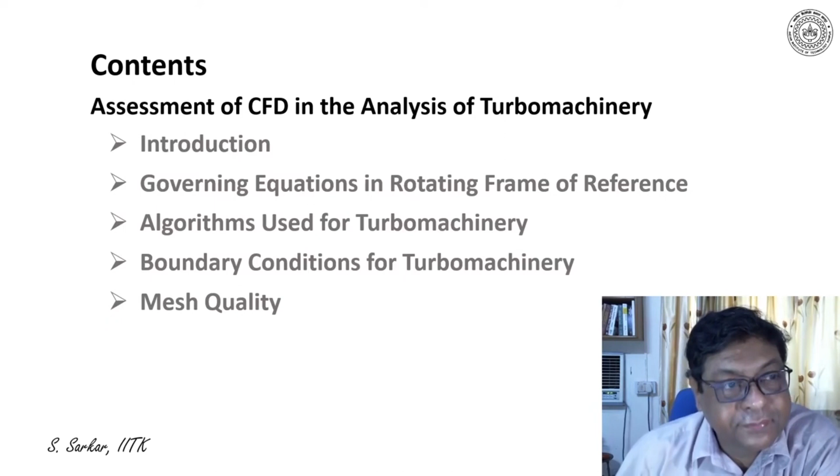In the previous lecture, I introduced computational fluid dynamics in brief. After this, the natural questions would be: why is CFD in the analysis of turbomachinery exceptional? Is some special training or awareness needed while applying CFD in the field of turbomachinery? My response would be yes.

The reason is that here the flow is very complex, as is the geometry. This is one of the most complicated flows encountered in practice. Thereby, the algorithm should be suitable for turbomachinery application, and thus the boundary conditions and the turbulence modeling, or if you perform LES in turbomachinery, become important. In this lecture, I'll discuss some of these points, how to apply CFD successfully in the prediction of turbomachinery flows.

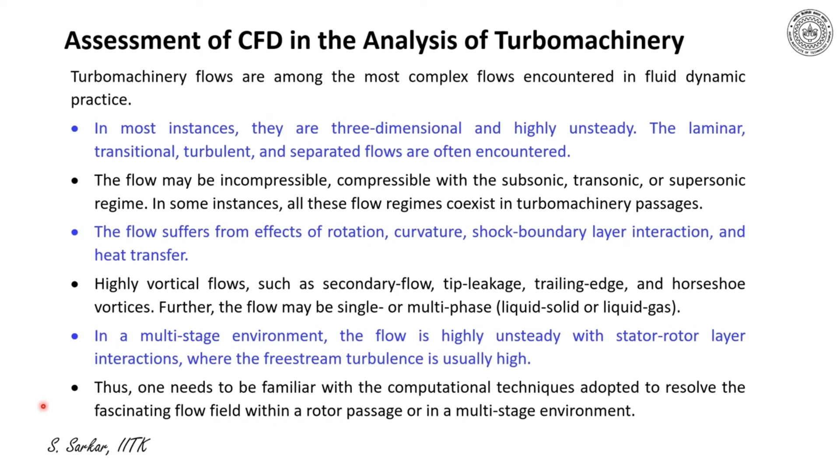I like to state that CFD and turbulence modeling have reached a high level of maturity relating to turbomachinery. Nowadays, Navier-Stokes solvers are routinely applied in the design and analysis of turbomachineries in industry. Furthermore, it is preferred to use finite volume methods with time-dependent procedures. Here, the same code or algorithm is valid for low subsonic to hypersonic flow, steady or unsteady environments, external or variety of internal flows, by changing the boundary conditions.

Thus, I like to say, if one uses a time-dependent technique based on the finite volume formulation, he can easily tackle different environments by changing the boundary conditions. Over the last 4 decades,

CFD applied to turbomachinery has made significant progress in the following areas: algorithm development, grid generation techniques to handle complex geometry, development of zonal techniques, transition and turbulence modeling, multi-phase simulations, application of proper boundary conditions, pre and post-processing of data, apart from computer architecture. So there is significant progress from algorithm to computer architecture.

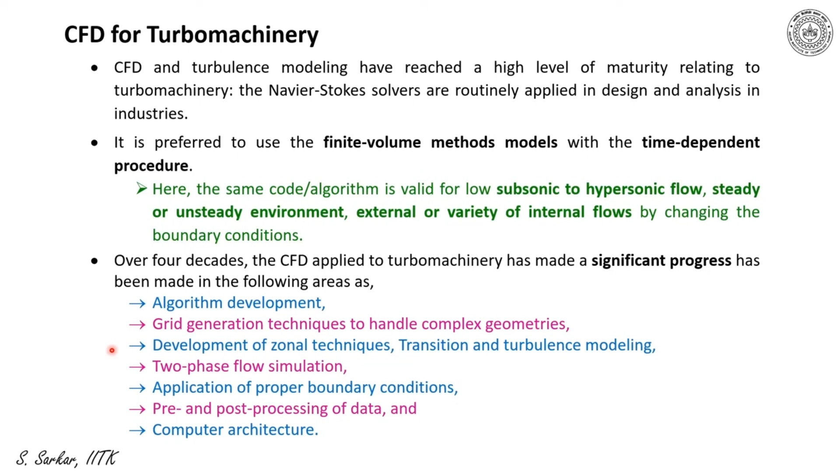In all of these fields, there are significant progresses and advancements that facilitate sophisticated calculations of flow and heat transfer, both in subsonic, supersonic, and hypersonic regimes within turbomachinery procedures. A breakthrough has occurred in the development of large eddy simulation over the last 15 years, resolving unsteady flows within turbomachinery passages at a realistic Reynolds number and free stream turbulence level.

Furthermore, CFD plays a major role in the aerodynamic analysis and design of turbomachinery. The use of CFD by fluid machinery manufacturers has increased significantly over the past few decades. However, CFD results must be complemented with experimental observations to design and optimize blade configuration. Furthermore, the literature illustrates significant use of commercial CFD software in the analysis of flows through turbomachinery.

However, the major issues associated with commercial CFD software used in turbomachinery are computational time and accuracy. This must be addressed. Furthermore, in an unsteady flow, a solver needs to run for millions of iterations on huge grid points, demanding the use of multiprocessor and multi-CPU HPC applications, which is not trivial with commercial software.

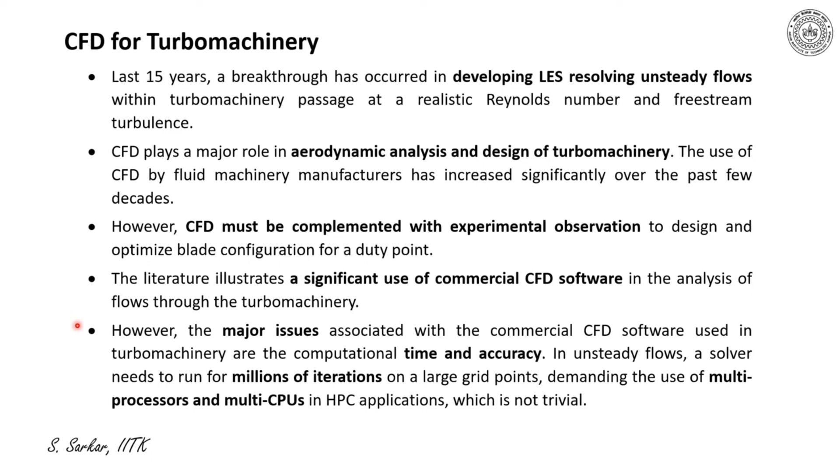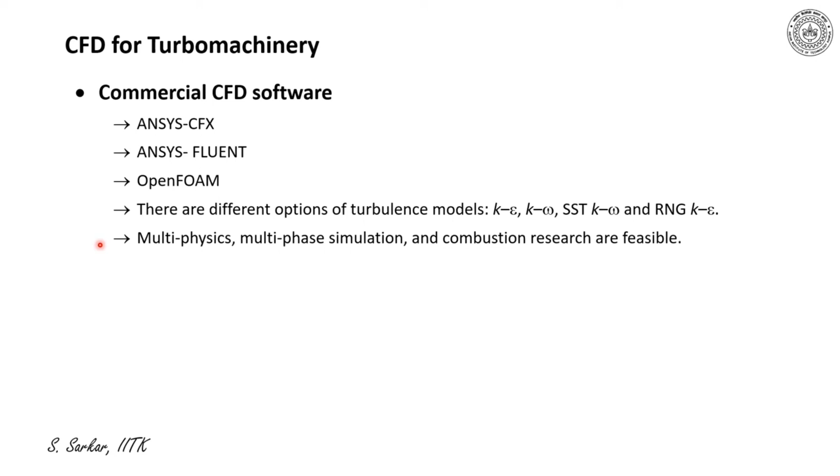Major commercial CFD software being used for turbomachinery applications are stated here: ANSYS CFX, ANSYS Fluent, and OpenFOAM - these three softwares are being used. There are options for different turbulence models such as K epsilon, K omega, SST K omega, and RNG K epsilon models. These models can easily be adopted while conducting calculations using one of these CFD softwares. Furthermore, multiphysics, multi-phase simulation, and research on combustion are feasible with these softwares.

Now I like to say that attention must be given to the governing equation in a rotating frame of reference. We know there will be effects of centrifugal and Coriolis forces. Thus, we'll now consider the modification of the Navier-Stokes equation due to the introduction of Coriolis and centrifugal forces. The governing equation of fluid mechanics in a rotating frame of reference will be explained now.

The momentum equation in rotating frame of reference, neglecting angular acceleration, can be expressed as rho within the bracket del W del T plus W dot del W plus omega cross omega cross R plus twice omega cross W equal to minus del P plus del dot tau ij plus rho g. This is the expression of momentum equation with rotation, equation number 20.

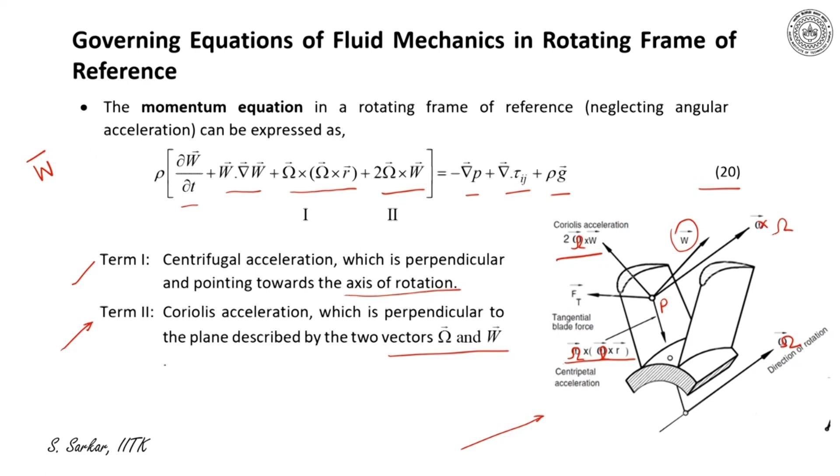We'll continue the discussion on Navier-Stokes equation in rotating frame of reference. The governing equations are employed either in the integral form while conducting the finite volume formulation, or in the differential form for finite difference formulation. Furthermore, the most appropriate coordinate system for turbomachinery is the rotating cylindrical coordinate system.

Thus the Reynolds average Navier-Stokes equation in a rotating cylindrical coordinate system can be expressed as del Q del T plus 1 by R del R of R into E plus 1 by R del theta of F plus del Z of G equal to 1 by R into S, equation number 21, where Q is the solution vector, E, F, G are the flux vectors, and S is the source term.

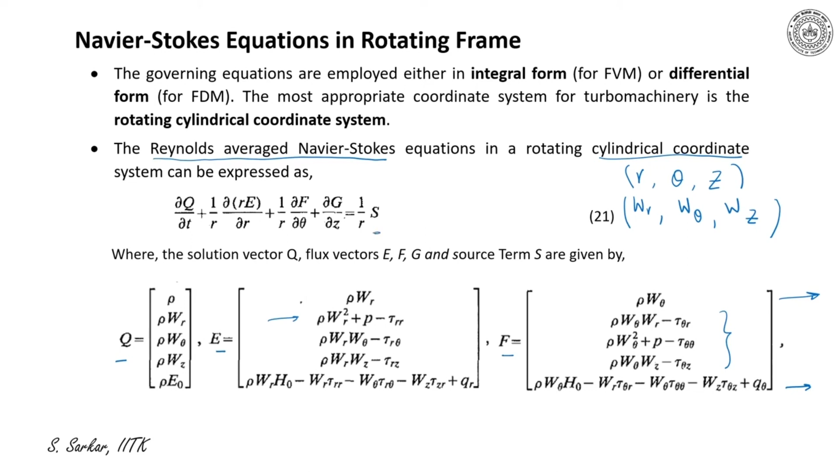Now I'll have to define S, which is the source term here, similar to the vectors E and F which I have defined, and G.

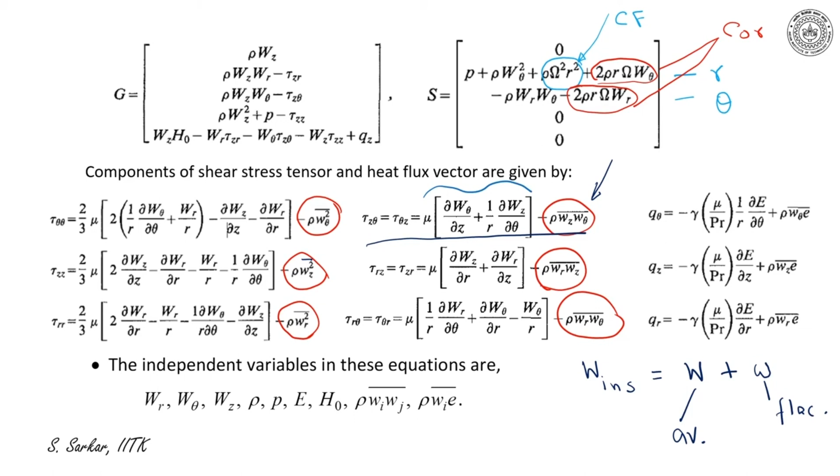There will be a laminar part and there will be a turbulent part. This is the laminar component and this is the turbulent stress.

Similarly, if you see the heat flux vector, there is a laminar part and a turbulent heat flux: rho W theta small e average, rho WZ small e average, rho WR e average. These are turbulent heat flux. Hence, because of this turbulent fluctuation, the laminar heat flux would be added with this turbulent heat flux. L stands for the laminar part and T stands for the turbulent component.

In this expression of shear stresses and heat flux components, we have appreciated that because of turbulent fluctuation, there will be additional stresses and additional heat flux quantities. This turbulent shear stress tensor and heat flux vector are evaluated by turbulence models. Thereby, a substantial model has been proposed to evaluate these turbulent quantities, that is, shear stress and heat flux quantities.

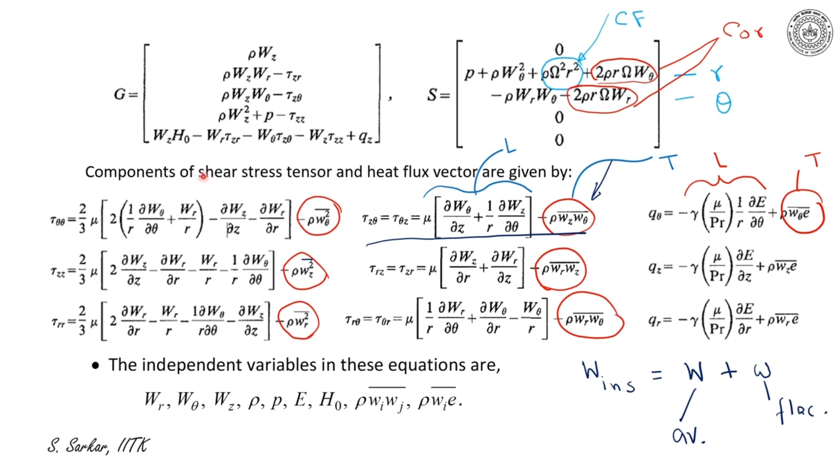Here I have indicated the independent variables appearing in the Reynolds average equation. They are WR, W theta, WZ, meaning the relative velocity components in R, theta and Z direction, apart from density, pressure, total energy E, enthalpy H0, and the turbulent shear stress, indicated by rho WI WJ average, and heat flux tensor as rho WIE average. As indicated, this turbulent stress and heat flux vector would be evaluated with the help of a turbulence model.

Now, an equation of state, P equals rho RT, Sutherland's law of viscosity mu, and the constant Prandtl number assumption will enable us to predict all variables for a laminar flow. For a turbulent flow, 9 additional variables such as rho Wi Wj average and rho Wi small e average have to be evaluated, which represent the turbulent stresses and turbulent heat flux tensor.

Many models have been proposed to mimic the effect of turbulence. Lately, large eddy simulations are successfully being used to resolve the turbulent stresses and heat flux tensors in turbomachinery flows.

Based on the application, the following governing equations can be used. Suppose for an inviscid flow, we may restrict to an Euler equation, while for a viscous flow, we may adopt the Navier-Stokes equation. Furthermore, the simulation could be two-dimensional or three-dimensional based on applications.

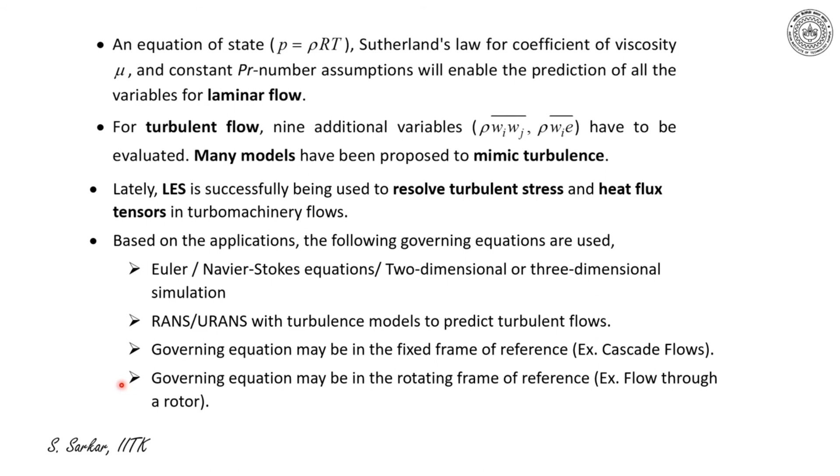In turbomachinery, the flow conditions vary widely. The situation may demand prediction of inviscid flow or prediction of a highly turbulent viscous flow. It may need to solve subsonic to hypersonic regimes, and furthermore, it may need multi-phase simulations. Often, we restrict to cascade predictions.

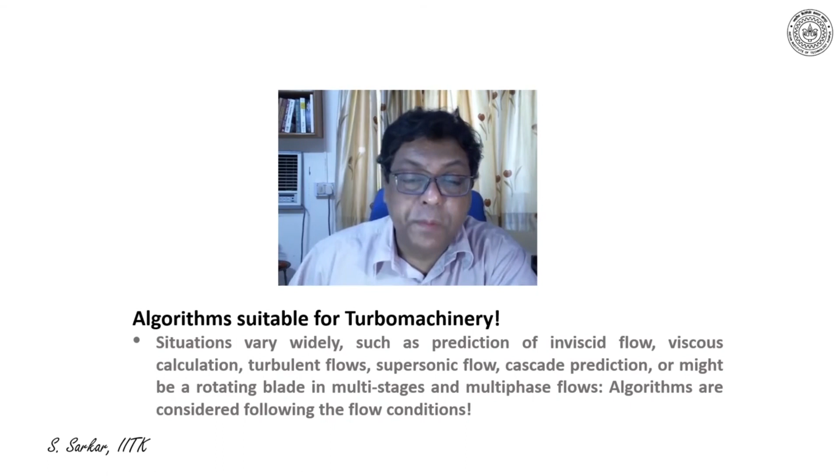The situation may demand multi-stage prediction illustrating complex blade-wake interaction. Thus, the algorithm considered for turbomachinery analysis should be suitable to tackle this variety of complex environments. That's why we select and design algorithms based on the needs of turbomachinery analysis and flow environment. Both the pressure-based method and density-based method are used for turbomachinery applications.

Among the pressure-based methods successfully used for turbomachinery analysis are SIMPLE, that is semi-implicit method for pressure-linked equations, derived by Patankar and Spalding in 1972; MAC, marker and cell algorithm, developed in 1965; and the fractional step method by Kim and Moin in 1985. All these algorithms are used for solving three-dimensional, time-dependent, incompressible Navier-Stokes equations.

The density-based method is usually put in time marching technique, considering that a time marching method is valid for subsonic to transonic flow regimes. Among the density-based methods successfully used for turbomachinery are listed here: Lax-Wendroff scheme in 1964, predictor-corrector MacCormack scheme in 1969, and Jameson algorithm developed in 1981.

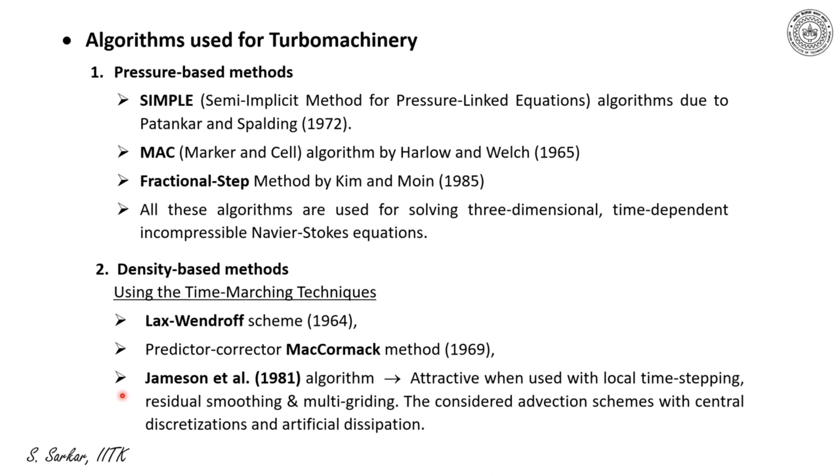Jameson's algorithm is very attractive for turbomachinery applications when used with local time stepping, residual smoothing, and multigridding. This allows faster convergence. Here, the advective terms are discretized with central discretizations, along with introduction of some artificial dissipation. This artificial dissipation corrects the dispersion error.

Density-based methods suffer from dispersion error associated with oscillation in the solution while resolving discontinuity. To mitigate this problem, Roe has developed a scheme referred to as the Roe upwind scheme. The present day challenge is to develop an algorithm which can capture discontinuities without oscillation, and at the same time be robust and fast.

I'd like to tell you now about LES solvers. Lately, compressible flow, which involves filtered Navier-Stokes equations, is solved by large eddy simulations. Often, the algorithm named AUSM and its family, developed by Mary and Sagaut in 2002, are used in resolving the flow within turbomachinery passages. Here, the convective fluxes are often discretized with third order accurate schemes. So this is so far with LES for compressible flow applied to turbomachinery environments.

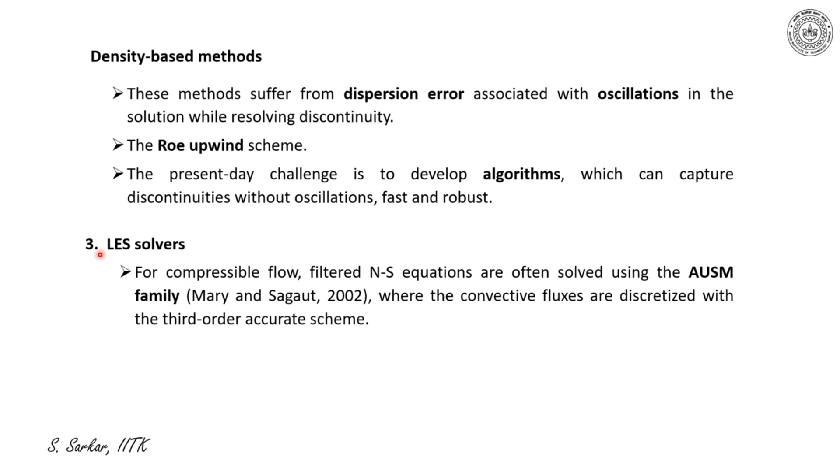I'll discuss now about mesh and boundary conditions. They are very critical issues while predicting turbomachinery flows. The quality of mesh, that is orthogonality and uniformity, needs to be maintained to get a reliable solution within the turbomachinery passage. While explaining the boundary conditions for turbomachinery blade rows, I like to state that specification and enforcement of proper boundary conditions are very vital to accurately capture the physics of flow through turbomachinery passages.

The essential flow variables here are W, P, rho, T, K, epsilon, P0, T0 and H0, where W refers to relative velocity, P for pressure, rho for density, T for temperature, K for kinetic energy, epsilon for dissipation, P0 for total pressure, T0 stands for total temperature, while H0 is the total enthalpy of fluids.

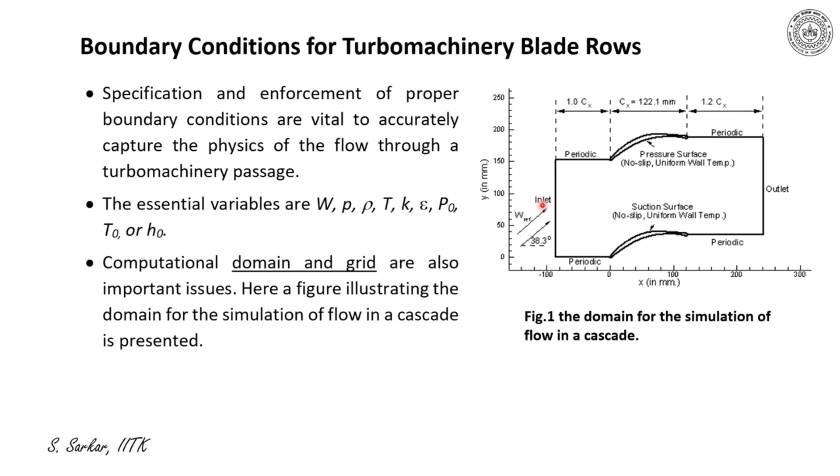However, please note that at the inlet, we know the magnitude of the relative velocity entering the domain and the flow angle. I'd like to explain further about the computational domain. Strictly speaking, the inlet and exit plane should be located far upstream and far downstream of the blades, such that the influence of the blade row under consideration is negligible. The computational resources make it prohibitive to employ the ideal condition. Hence, most investigators usually locate the inlet and exit planes at about 1 to 1.5 chord upstream and downstream.

Regarding inflow and outflow boundary conditions, one of the most important issues in prediction of flows through turbomachinery is prescription of inflow and outflow boundary conditions. The prescription of boundary conditions at the inlet and exit boundaries depends on the flow regime, that is, whether the flow is subsonic or supersonic, and also the nature of the equations.

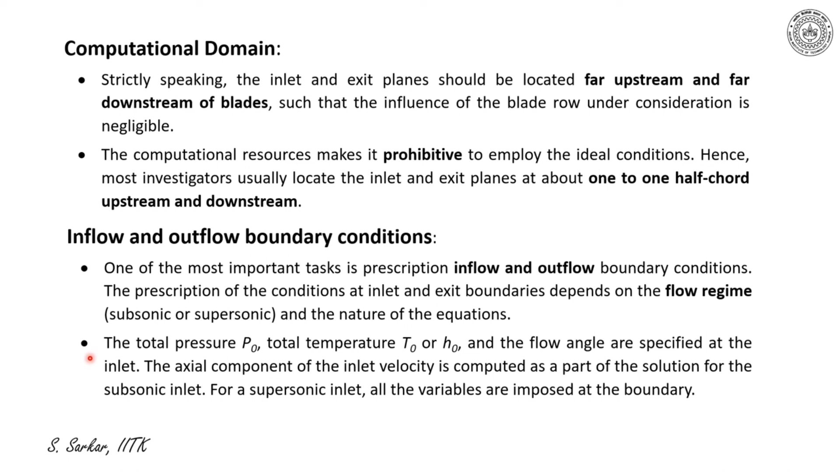The total pressure P0, total temperature T0 or enthalpy H0, and the flow angle are specified at the inlet. The axial component of the inlet velocity is computed as a part of the solution for the subsonic inlet. For a supersonic inlet, all variables are imposed at the boundary. Similarly, if the axial exit velocity is subsonic, the exit static pressure is imposed and all other variables are extrapolated from the interior. For a supersonic exit, all variables are extrapolated from the interior.

If the equation is solved in the rotating coordinate system, the inlet relative stagnation pressure P0R, temperature T0R, and the blade speed are typically prescribed.

The static pressure is usually imposed at the hub, and the radial equilibrium equation is solved to evaluate the distribution of pressure at the inlet and exit. The radial equilibrium equation is given by del P del R equals rho W theta square divided by R.

The infinite blade row condition is stated as the periodic boundary condition enforced upstream and downstream of the blade in a cascade to simulate the infinite blade row condition.

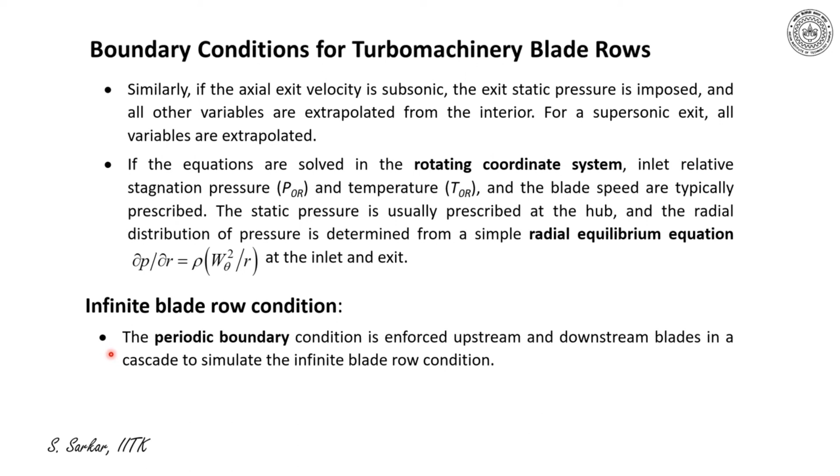Regarding surface condition, the no slip boundary condition, that is WR equals W theta equals WZ equals 0, is imposed on the surface for the solution of the Navier-Stokes equation.

Typically either del P del n, where n is the direction normal to the surface, is assumed to be 0, or del P del n is evaluated at the surface by solving the normal momentum equation.

Furthermore, please note that pressure and velocities are related by the energy equation if the flow is assumed inviscid and adiabatic. Thus, the pressure can be specified at the boundary from the derived velocity field by solving the Navier-Stokes equation.

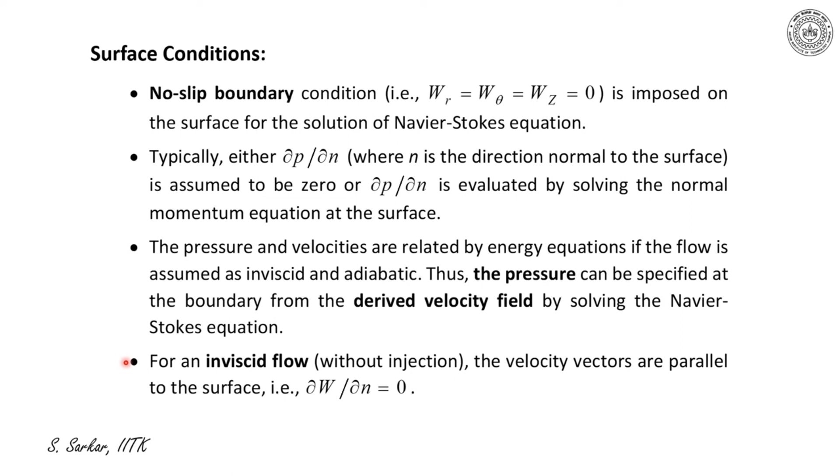For the surface temperature, either the wall temperature or the normal temperature gradient del T del n is specified. For an adiabatic wall condition, del T del n equals 0. For the non-adiabatic wall condition, it is necessary to carry out a heat transfer analysis to derive the wall temperature, as an example, the conjugate heat transfer analysis, where the conduction equation along with convection would be solved to evaluate wall temperature.

For turbulent flow, the equations of turbulent kinetic energy K and dissipation parameter epsilon need to be specified at the boundary. If a two-equation model, suppose the K-epsilon model, is employed for turbulence closure, constant values of K and epsilon are imposed at the inflow boundary based on the specified free stream turbulence intensity and length scale.

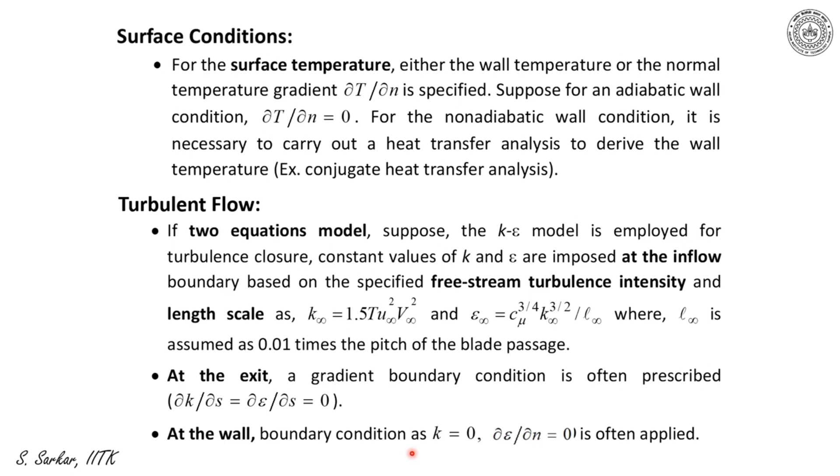Figure 2 in the next slide illustrates an LPT blade, and an H-grid is employed within the blade passage. Please note that the mesh developed here is almost orthogonal to the surface. The H-mesh within the blade passage is developed by applying the power law to the control function appearing in the elliptic grid generation scheme. The scheme was developed by Hsu and Lee in 1991. Please note that the orthogonality, aspect ratio, and uniformity are well maintained.

I'd like to add that often an H-grid is employed within the blade passage for turbomachinery applications. A highly skewed, non-orthogonal, and highly non-uniform grid evolves spurious solutions. Thus, skewed, non-orthogonal, and non-uniform grids must be avoided.

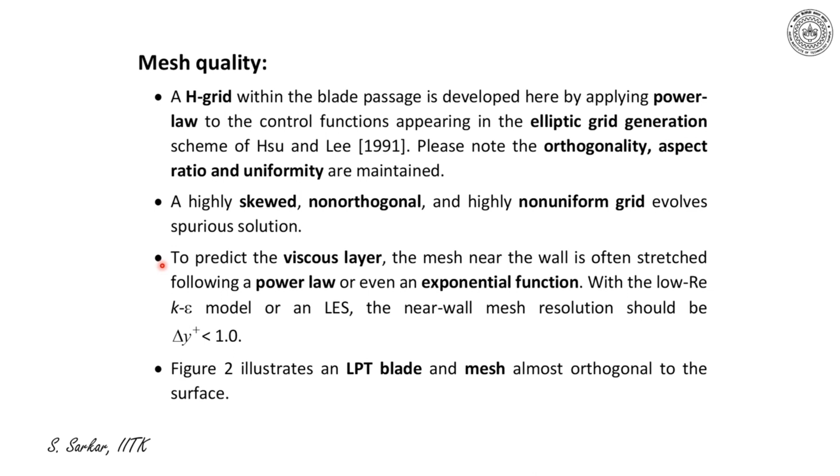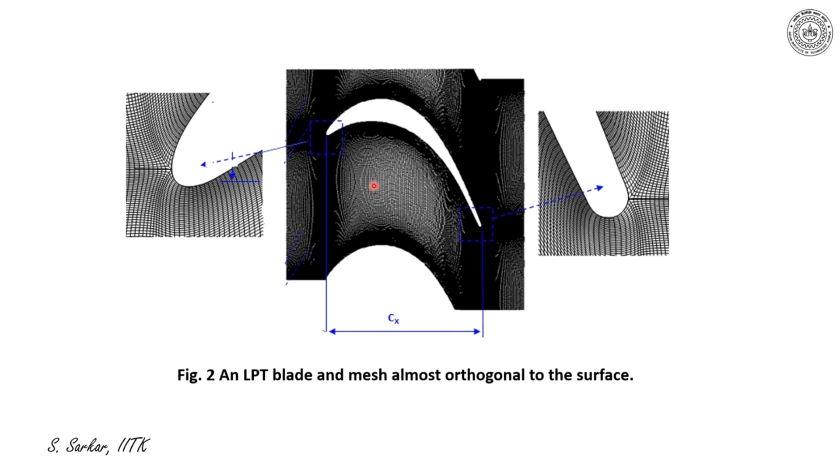Figure 2 here illustrates an LPT blade and the mesh around the blade, where the grid lines are almost orthogonal to the surface. Please note the grid near the leading and trailing edge, which are the critical regions, and the orthogonality is also maintained there, and they are refined near the wall to resolve the velocity gradients and the turbulence quantities.

I have tried to explain here in brief how to apply CFD in the analysis of flow through turbomachinery. Thank you for listening.